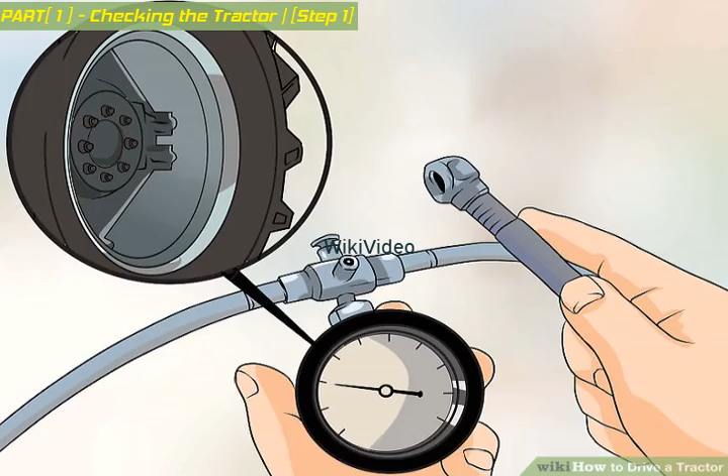Loose wheel lugs, nuts or bolts may need periodic tightening. Check your tractor's tire pressure. Low pressure in one or more tires may cause instability and create a safety hazard. If you're not driving your tractor every day, make it a routine to give the tires a quick once-over so you know they're in good shape before you get way out in a field.

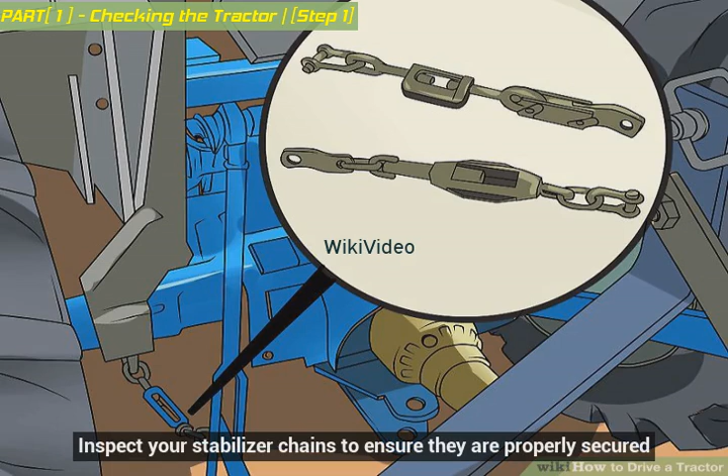Inspect your stabilizer chains to ensure they are properly secured. Do this when your tractor attachments are behind the tractor.

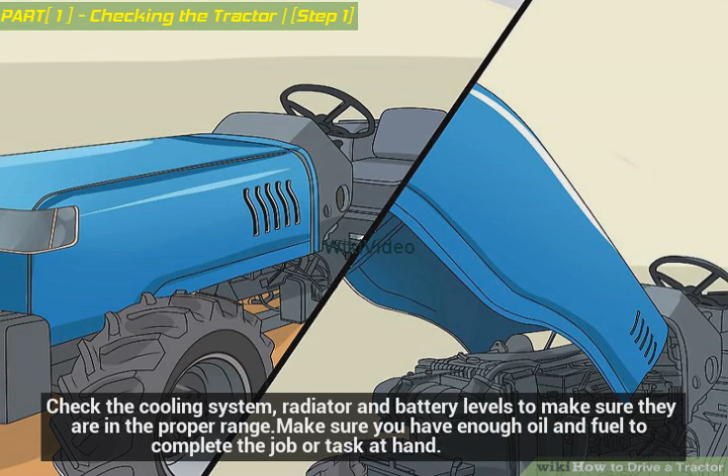Open the hood of your tractor. Check the cooling system, radiator and battery levels to make sure they are in the proper range. Make sure you have enough oil and fuel to complete the job or task at hand.

Be safe at all times. Wear good quality boots with gripping soles, and keep any long hair tied back. Avoid dangling jewelry that could become caught in moving machinery, and avoid wearing loose or baggy clothing while operating a tractor.

Always climb into the tractor using the proper hand holds. Climb up into the tractor's seat. Familiarize yourself with the controls and find the clutch. Set the seat so you can reach the steering wheel, throttle, and other controls easily with your hands and feet.

Wear your seat belt any time you're going to be around other vehicles. In the field, while it may seem like common sense to buckle your safety belt, you'll find almost no farmers strapping themselves in. More likely than an accident in your tractor will be the need to quickly turn off the engine and hop out and do something that needs doing. The safety roll bar will help to prevent serious injury. Practice good tractor safety and drive safely.

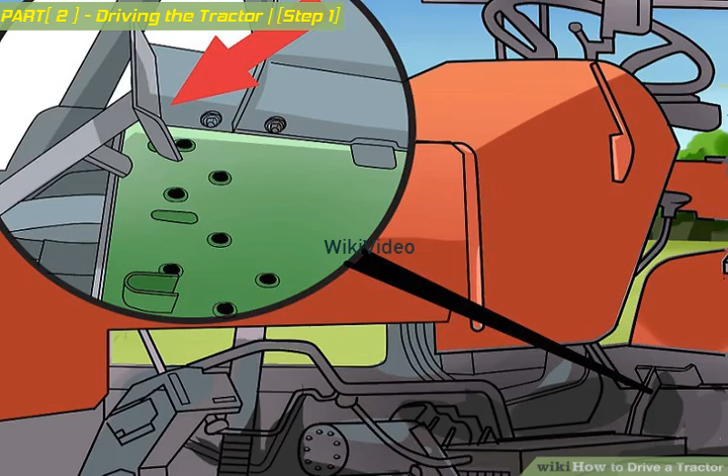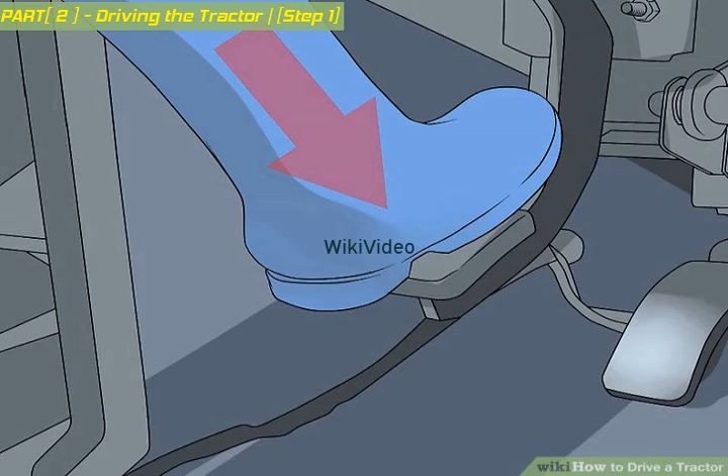Press the clutch pedal down to the floor with your left foot. You want to be sure the transmission is in neutral as you turn it over. Engage the brake with your right foot. Turn the key forward to start the engine. When it turns over, drop the throttle slightly without killing it to let the engine warm up a little. If you jump straight from turning it over to driving, you'll likely stall.

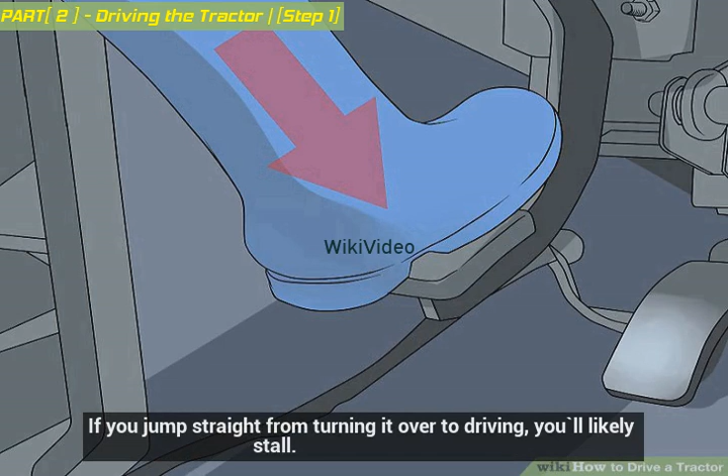To drive, release the tractor's parking brake. Continue holding the clutch to the tractor floor and put the transmission into first gear. Slowly lift your foot off the clutch. Just as with any manual transmission, you want to be slow and smooth as you let the clutch out.

It's a lot easier since you don't have to be actively pushing the gas. Keep the throttle at a low setting and take your foot off the brake. Maintain a uniformly slow speed. Tractors aren't made for going particularly fast, they're made for durability and power. Don't push it. Go slowly, treating turns, curves, and hills with special caution. Especially if you're using attachments and other hardware, go extremely slowly and use precaution when executing turns.

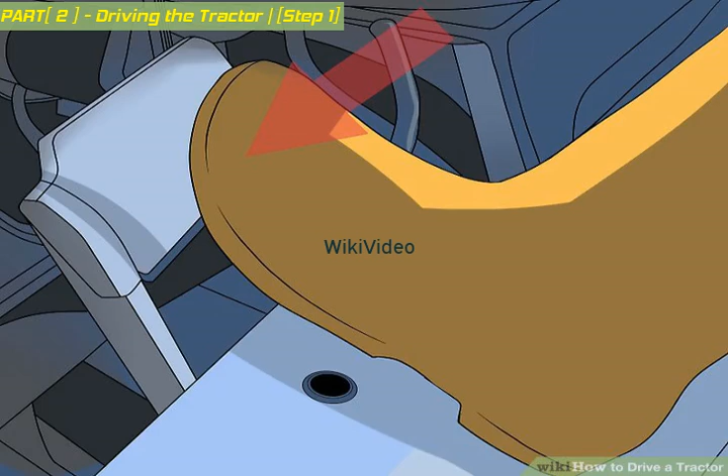To stop the tractor, press the clutch to the floor completely. Switch the gears to neutral and set the parking brake. Slow the throttle. Turn the tractor key to the off position to stop the tractor engine.

Make sure all operators are trained and familiar with the tractor. For farm hands or employees younger than 16, familiarize yourself with OSHA labor standards regarding child labor. Some jobs involving heavy machinery are too dangerous to be performed by less experienced workers. Number 1: The FLSA prohibits youth under 16 years of age from operating a tractor of over 20 PTO power takeoff horsepower, and from connecting or disconnecting implements or parts to such a tractor.

In some places, it's necessary to obtain a registration to drive your tractor on the road, the UK and Australia for example, while many other regions forego registration as long as your tractor displays reflective caution tape and is clearly visible.

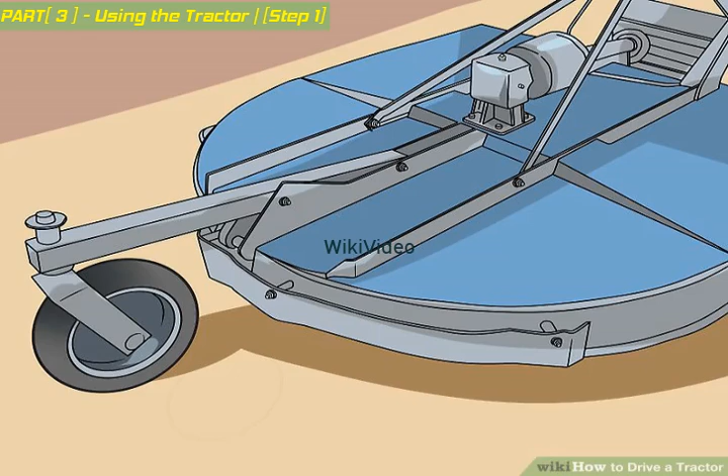Outfit your tractor with a mowing attachment. For heavy-duty weed control and maintenance of rough areas of your property, it's useful to get a mowing attachment to eliminate invasive weeds and brush.

Attach a tractor bucket and learn to use it. Most Kubotas and other common smaller tractors have a wide variety of attachments, including buckets that will make your tractor into a kind of small-scale backhoe. You can haul brush and other junk around your property.

Follow proper driving safety when adding a bucket. Never drive with the bucket in full up position, but always remember to raise it into the drive position so it's not dragging in the mud.

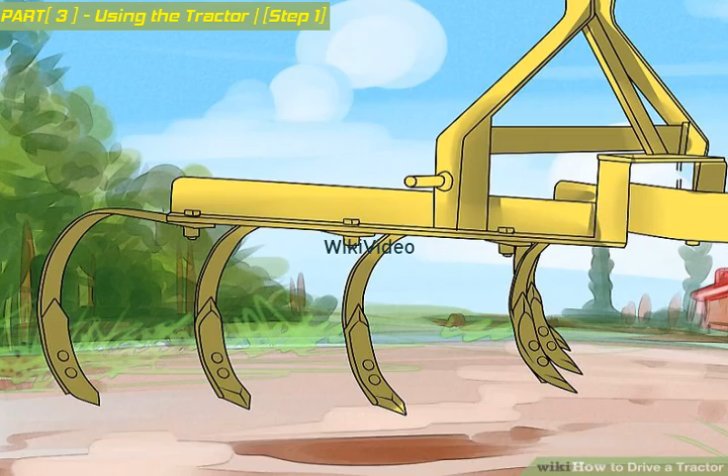Use cultivator attachments on larger tractors to plow for planting. If you've got a row to hoe, the job is much easier with a cultivator to break up the dirt and help plant your crop.

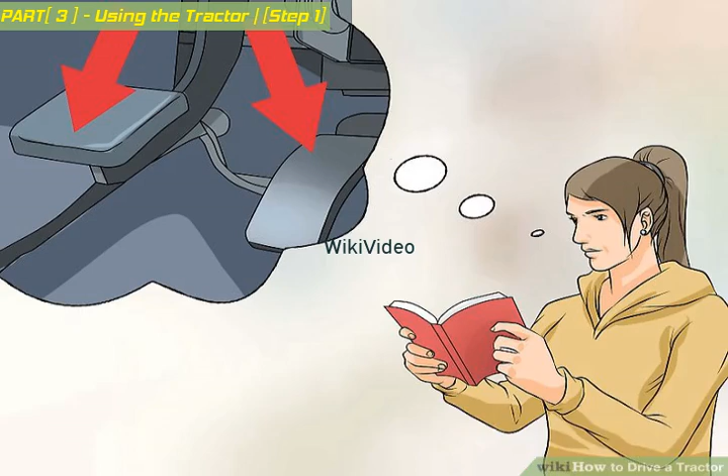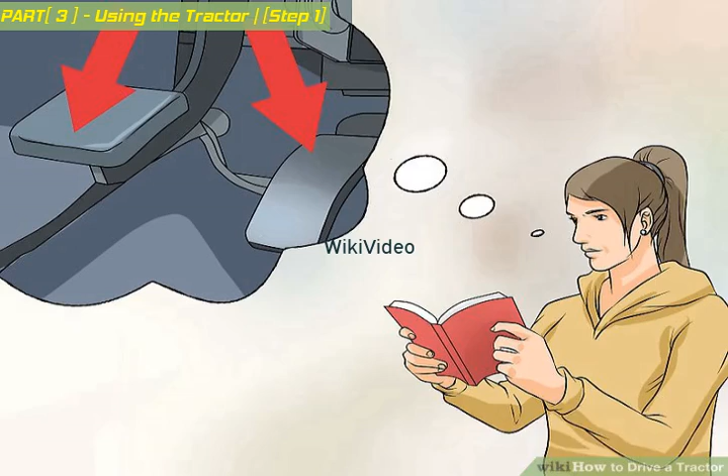Make sure any attachments heavier than the tractor itself have independent brakes. If you're using tractor attachments, you'll need to be especially careful to drive extremely carefully and use the guidelines outlined in the owner's manual for each implement, attachment, or device. Make sure that heavier attachments are outfitted with independent brakes in good working condition, and learn to use them.

Hitch all attachments properly. Make sure to follow proper safety precautions while hitching your tractor to wagons or other farming implements. Make sure that the area in front and behind is clear, making sure especially that no one is behind the tractor.

Back the tractor up slowly. Practice a safe stop, applying the emergency brake. Put the transmission in neutral. Dismount the tractor and hitch up.